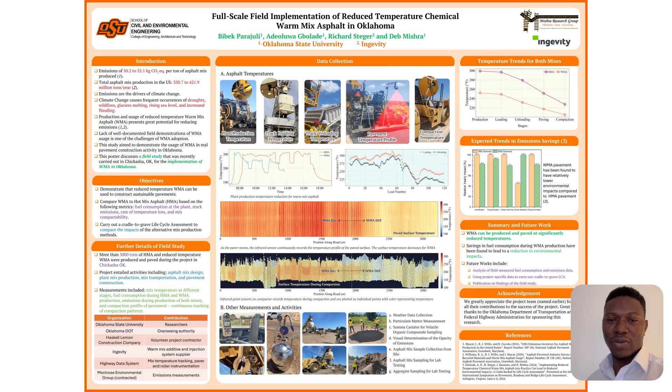Hello everyone, today we are here to talk to you about our study which is on the full-scale implementation of reduced temperature warm mix asphalt in Oklahoma. As we all know, climate change has been causing a lot of disasters in our world today, and emissions from the construction sector have actually been found to be one of the main drivers of climate change. So in the asphalt pavement industry, the usage of reduced temperature warm mix asphalt has actually been found to be one of the ways where we can reduce our emissions.

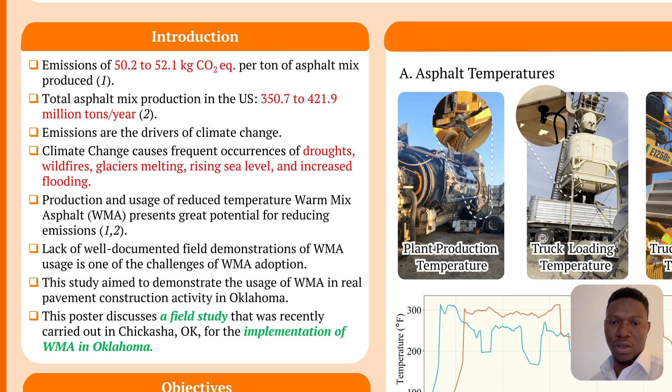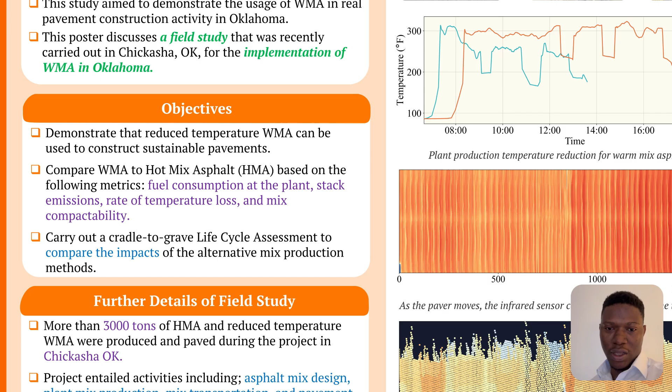But the lack of well-documented demonstration of the use of WMA in real life has been one of the major challenges to WMA's adoption. And that is why in this study, we aimed at demonstrating that WMA can actually be produced and paved at reduced production temperature. Also in this study, we wanted to compare HMA to WMA based on different metrics: fuel consumption, the rate of temperature loss, mix compactability, and stack emissions. During this field study, we produced more than 3,000 tons of HMA and WMA. And my colleague Bibek will give you more details about the data collection.

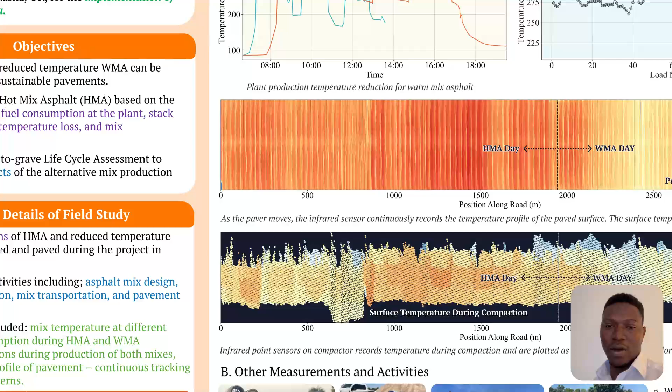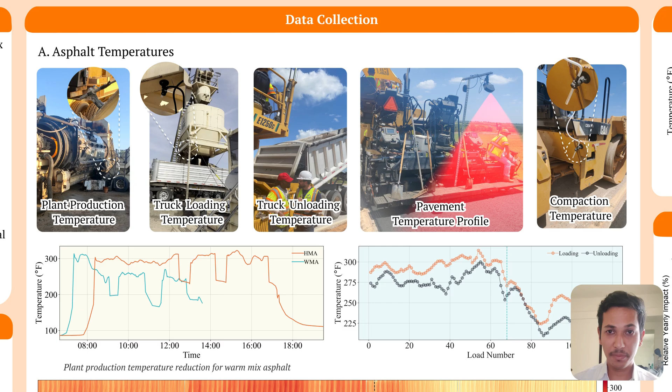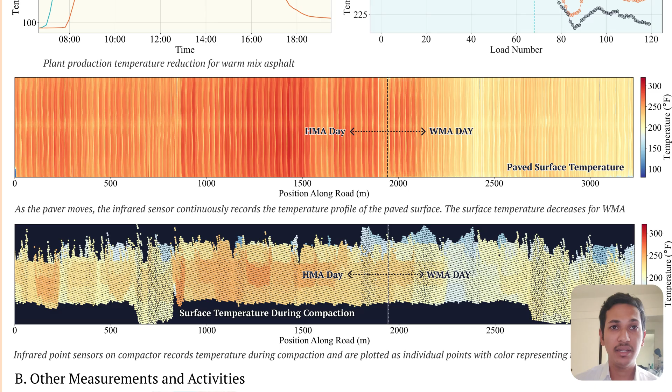Okay, so during the field implementation of warm mix asphalt, in short WMA, our main goal was to measure the temperature of asphalt mix at different stages of production. We use infrared sensors to measure temperature during production, loading, unloading, and throughout paving and compaction. As we can see from this graph, WMA production temperatures were consistently lower than the hot mix asphalt, in short HMA. Furthermore, this heat map shows the temperature across the width of the pavement, and we can notice that on WMA day, the pavement temperature was lower than on HMA day. The same pattern can be seen during compaction as well.

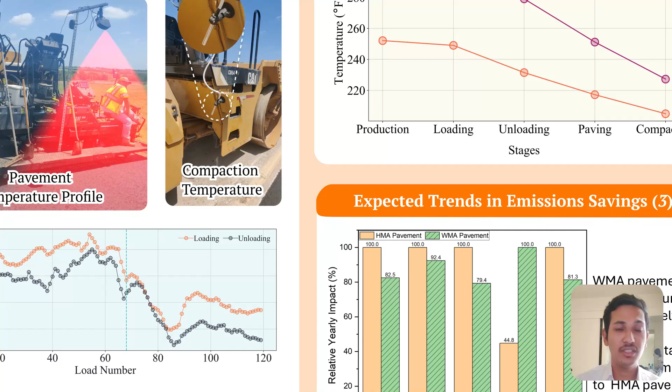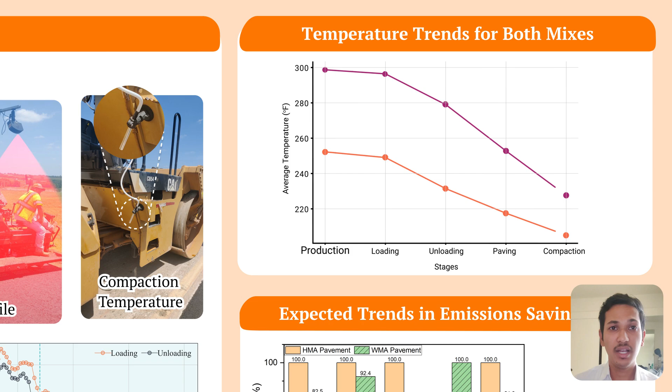Besides temperature measurements, we also collected weather data and monitored emissions like particulate matter and volatile compounds. We also collected asphalt mix and aggregate samples for lab testing. The preliminary analysis shows that the average temperature difference during production between HMA and WMA was about 50 degrees Fahrenheit. Also, temperature drops can be seen in both mixes at later stages. However, the rate of drop is faster in case of HMA. I would like to mention that previously we quantified the environmental impact of HMA and WMA in the lab, and the result shows that WMA has a lower environmental impact.

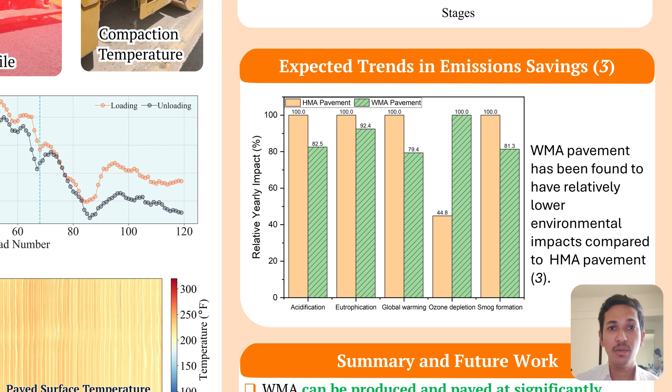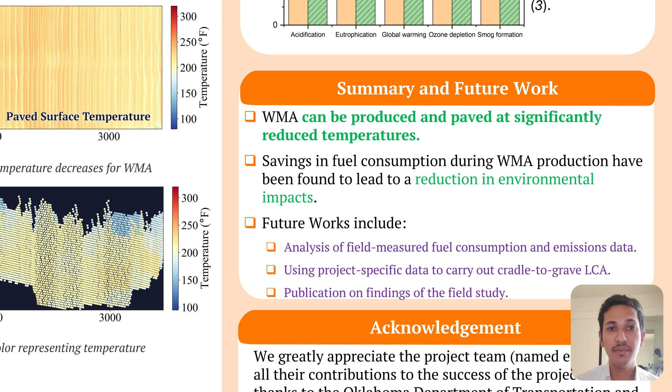In summary, I would like to say that the asphalt can be produced at lower temperature, which reduces the fuel consumption and eventually reduces the environmental impact. Moving forward, we will be analyzing fuel consumption and emissions data, and we will also be conducting a cradle to grave life cycle assessment.